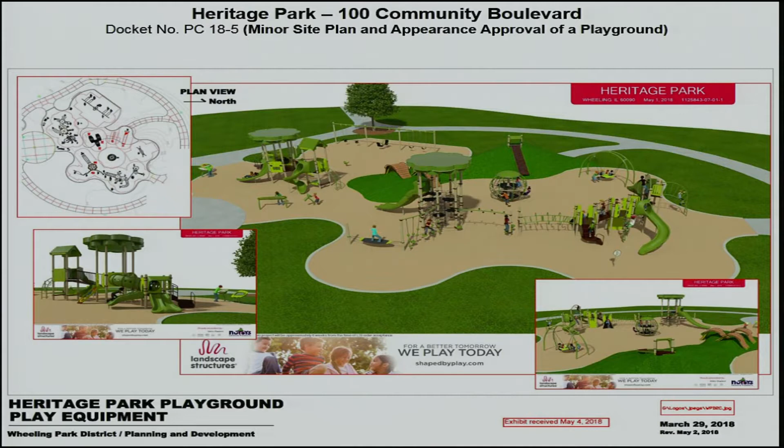Our intention on the landscape is generally to keep it simple. We want this playground to be open, to be visible. So the theme of the landscaping is primarily open and natural.

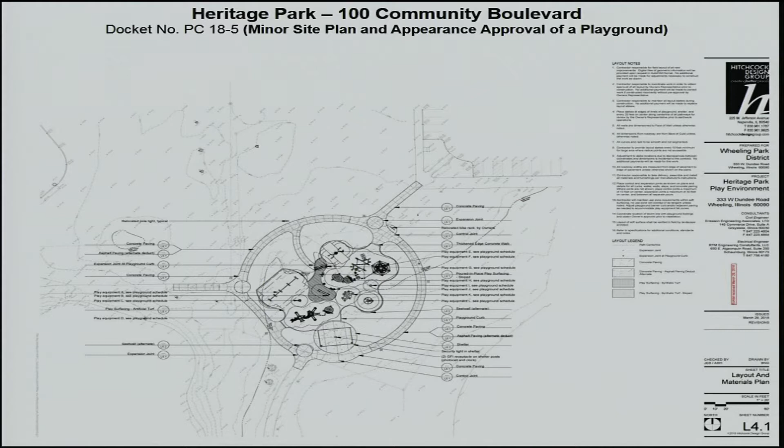And on the playground, on the landscaping itself... I think it's the landscape plan. There you go, it's kind of hard to see, but we have one here.

The idea there is we've got transitions: you have the path going around, lawn areas, and then the perennials and shrub areas, and then you're into the playground. So there's a lot of transition, and we're working with heights, textures, and colors throughout the landscaping. There's a lot of color in the landscape palette from spring all the way through fall.

We've got very few shade trees. I believe there's 9 shade trees, maple for fall colors. There's a Japanese Zelkova, which is in the elm family but resistant to Dutch elm, and that's why it's being used. And then thornless honey locust and swamp white oak, which are trees that we have in Heritage Park. So it's kind of bringing in the landscape that we have throughout the rest of the park, including some of that in here.

And then the ornamental trees are primarily for color. We have serviceberry, which has white flowers in the spring but also has fall color, and the Peking lilac, which has fragrant flowers in the summer.

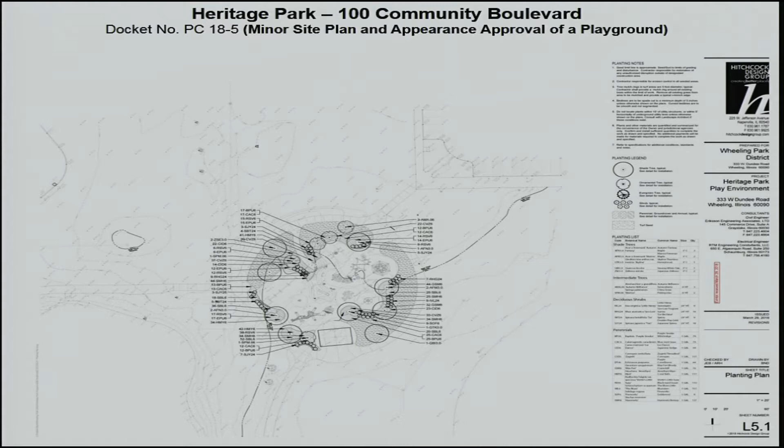Same with the shrubs, we've got a variety, 4 different types, all low. The idea is to keep views into this park, but they're all flowering, and most of them have fall color as well, like the sumac and the spirea. And then perennials, we've got a nice mix that are going to provide colors throughout the season, yellow, indigo, purple, pink, a lot of different colors, and then some lower grasses too to give it kind of a natural look.

So there's all the pictures of the plant material, and this is kind of what we've been providing you with recently, not just the landscape plan but these images so you can have a better understanding of what the plants look like. So having said all that, we are very, very excited about this playground, and we look forward to it, and we'll be happy to entertain comments and questions.

Great, thank you, thank you Mr. Raffel. Commissioner Johnson. Well, thank you, as always you guys do a very impressive job on getting these packets together for us. The pathways are all asphalt?

The pathways around the playground are concrete. They are concrete? Right, just where you're tying in is the asphalt? Right. Okay, I really have no other questions.

Thank you very much. Commissioner Creech. Thank you, Mr. Chairman. Thanks for the great presentation, everything looks wonderful, I'm excited to see it finished. Thank you. What are you going to play on?

Commissioner Blanova, thank you. I don't have any questions or concerns. Thank you very much, beautiful, can't wait to start using it. Thank you.

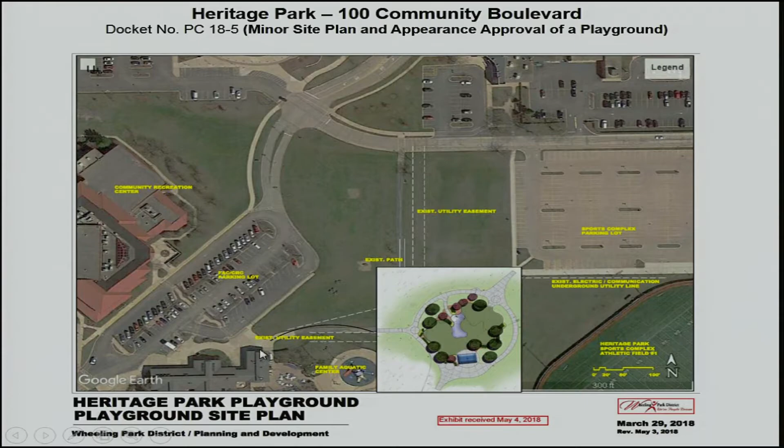Okay, I'm just wondering if you have to cross the parking lot to get to it. I'm sorry, the Family Aquatic Center has restrooms that you can access. Okay, so you can access that same from the outside, that's right? Yeah, so will you be allowed to go into the pool to get into the bathrooms? No, you can access the bathrooms from the outside, by the concession area. That's true, it's been a whole year since I've been there, so I forgot.

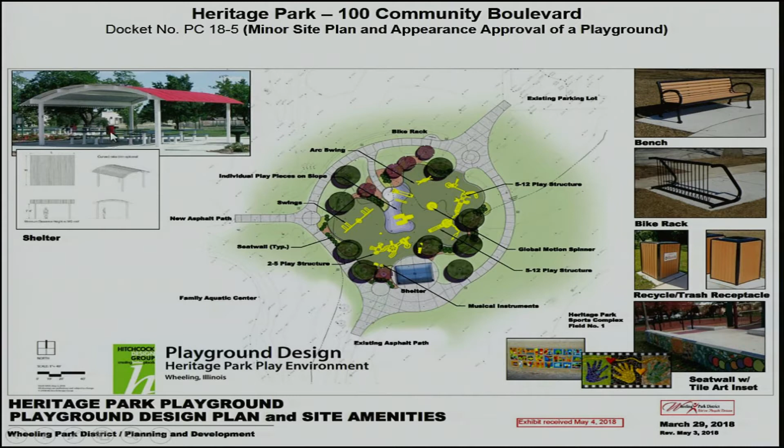Okay, and then in the picture of the example of the picnic area, there is a grill, you didn't say anything. Is there going to be a grill area in our version of the shelter? No, I think that was just the image that came from the catalog there.

Okay, it would have been nice, but I assume fire code and things. But yeah, that was it - restrooms and shelter, but looks amazing. And I would love a zip line in every park in the whole world, like at the library. This is - I've never seen the arch thing down the hill. I think that's very cool, and the roller slide. I'm looking forward to that, so yeah, very cool.

Thank you, Commissioner Powers. Thank you, Mr. Chairman. Wonderful planning as usual. Couple quick questions - you did mention lighting, is that going to be pole lighting, or are you going to have something like in the ground? I was just curious, you said the play area would be lighted. It'll be the pole lighting, the ones you see right there, they'll be relocated to the perimeter of the playground.

Okay, last thing too is, you have extensive landscaping. How do you typically make sure that that's maintained? I mean, as far as watering, do you have water trucks that go around and water the planting? We have water trucks, I believe. Sometimes we have the meter from the hydrants. There is a hydrant nearby, but we have water trucks, and we maintain our landscape pretty well done. I have nothing further.

Commissioner Dorgan: This is a wonderful design, and I really love the choice of all the trees and the planting, because I think it's going to be really nice all seasons. So thank you again for a complete packet, it's really appreciated. Thank you. I just have a few general questions.

The wall signage depicting the company's name will be displayed at the northwest corner of the building, similar to the sign on the existing building. The exterior lighting consists of parking lot and wall signs, wall light fixtures, and will follow the village's photometric standards.

Both the production bay and the office bay are rectangular in plan. The office bay will consist of offices, storage rooms, a break room, women's and men's toilet and locker rooms, a tool room, a maintenance room, mechanical room, and a quality control lab. Each elevation has been carefully designed to complement the look and feel of the existing facility, incorporating matching brick, windows, and metal siding. Work will consist of, but not be limited to, reinforced concrete foundations, steel structure, exterior wall facade consisting of masonry and metal siding, roofing, doors, windows, interior finishes, loading dock doors, and equipment and MEP FP work.

Masonry will be featured at the office bay on the south side of the production bays and a portion of the east and west sides of the facades of the production bays. We have the masonry and metal siding samples if you'd like to see them, and we will comply with the Engineering Division and Fire Prevention Bureau memorandums. With that said, I'd be glad to answer any questions you may have.

This is a public hearing. Is there anyone in the audience that wishes to speak on this matter? No. Okay, great. We're going to start with Commissioner Powers.

Thank you, Mr. Chairman. I'm going to go to a question in the packet. I was mentioning about a 13-foot band of masonry on some of the elevations. Could you indicate where that is? Because I think staff had a question about it too.

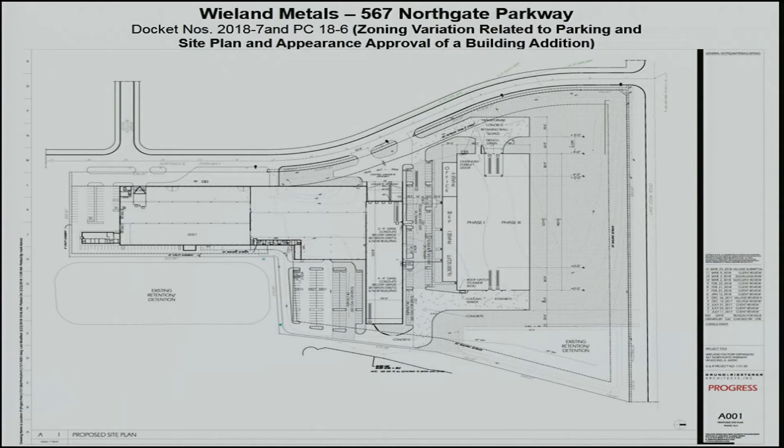Andrew, can you pull up page 41? I have a question - which plan is that, is there a number on it? There's always a number on the plans. A001, is that the one? Well, I don't know, I'm not really sure. That's A001 on the screen.

Looking at the West Drive and the rear of the building, those three parking aisles - I believe I saw other renderings where the west aisle is shaded and one row at the back on the east side is shaded. Do you know why? We're doing different paving - some concrete paving, some asphalt parking paving, and also driveway paving. It's just indicating the different materials we're using. Okay, so it's just to differentiate between the materials, because I didn't know.

The only other question I had was, in the new addition, the two big additions with the bays in the back facing east, do you have any plans to put any lighting on there to light that up, or no? I saw in some of your other... There's lighting above the doors, that's about it. There is? Okay, there will be? Yep. Okay, I really have nothing else at this time.

I'll ask the poll right now. I'm proposing that the brick get extended all the way to the north on the west elevation.

Commissioner Johnson, are you saying all the way across? Yes, so in between the doors and everything? Yes, as it is on the existing buildings. Yeah, I think it would look better. Commissioner Blanova? Yes, thank you, I think it will look better. Commissioner Johnson?

You don't get to vote twice. I'm not in Chicago. I agree with what Don said, so I'm a yes. Commissioner Dorban? Yes. Commissioner Kalis? Yes. And Commissioner Creech? Yes.

Great, thank you, we will extend it on the north. We may stop it maybe by the windows there, so when we head onto the building it's easier. So at the beginning of it or at the end? The end of the beginning, windows, just a couple feet from the end. Okay, that would be fine, just to make it easier when we head on.

And I've always pronounced it Wieland, but it is Wieland, Wieland Metals. Okay, great, so I learned something new.

What happens in those buildings? I'm curious, because I go by and I see... secret? Okay, that's what I thought. I go by there sometimes and the overhead doors are open and I see a whole heck of a lot of steel, so what goes on? Their major product, I don't know Frank, you can help me out here, their major product is copper.

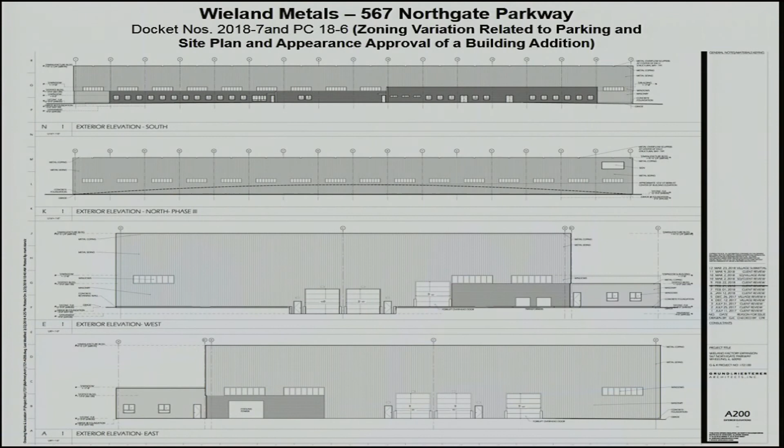Well, I think what you're seeing right now on their representation of the north elevation is the berm, the height of the berm superimposed on the building to illustrate how little of the building you would see from Lake Cook Road. The landscape plan, let's see, it's on one of one.

One of one, the Julie in the corner. Where am I looking here? Maybe the last sheet, Andrew. Nope, maybe not. So there's an existing berm, you can see it on the topo. There's an existing berm along Lake Cook. The petitioner intends to keep that berm throughout the construction.

If the desire of the Plan Commission is to reduce the landscaping in this area to avoid tearing it out, we can certainly work with the petitioner on moving it north so that it would be clear and have the greatest chance of surviving the future addition as well.

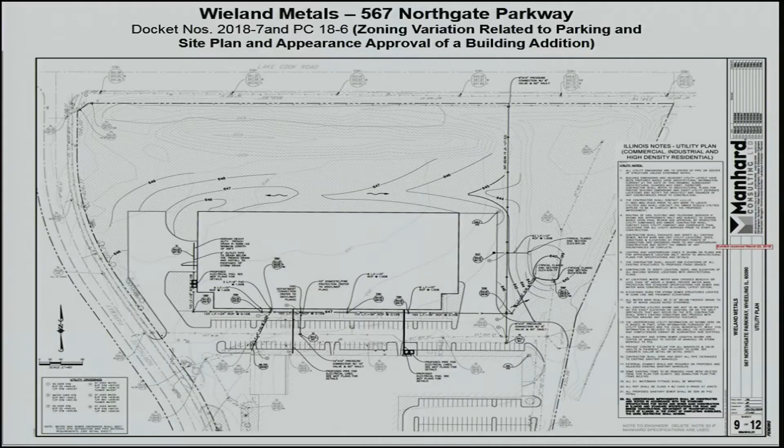So, I don't know how to poll that. Should we give the petitioner latitude on the landscaping on the north side of the addition? It's a good way to put it, and working with the village staff.

Commissioner Johnson? Yes. Commissioner Blanova? Yes, sorry, speak a little louder. Apologies, yes. Commissioner Powers? I would think so, yes. Commissioner Dorban? Yes. Commissioner Kalis? Yes. And Commissioner Creech? Yes. So we'll give you, work with staff.

We'll work great with Andrew and Brooke. Maybe add some things, but maybe not as extensive as here, but maybe stuff out towards the berm. Possibly, put something out on the berm. Exactly, just to save that. Plus, everybody drives 70 miles an hour on Lake Cook Road anyway. So, but I mean, it's extensive and it's nice, and I would hate to see that ripped out, so.

Can a comment go on the landscape plan that says those plantings will be irrigated, or is that just an understanding? I don't see it on the landscape plan. I thought there was a staff comment, one of the proposed conditions by staff. We're working on drafting the rest of it right now.

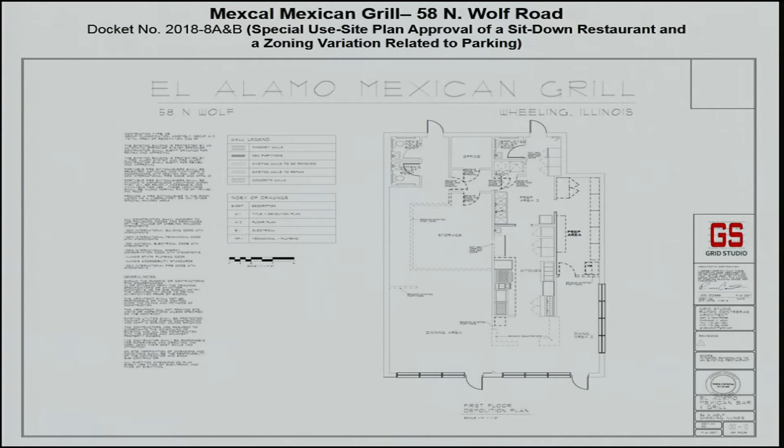So, as you can see, all the right side of the business is going to stay the same. We're not touching anything on the kitchen or the existing counter area or storage room. The left side of the business is the one that's going to get remodeled. Currently, where you're pointing at, there's a small storage room in there. That storage room and that wall are going to disappear in order to make it look bigger and have better space for our staff and customers to feel more comfortable. That's basically the only big change besides adding the bar to the restaurant.

Okay. All right, this is a public hearing. Is there anyone wishing to speak on this matter? Okay.

We'll start with Commissioner Kalis. Thank you very much, Chairman. I had a question, but I think it was answered by Andrew's explanation — it's been operating this way for a while, and the variation is not as big a deal because you've obviously found that the parking isn't a problem. So I guess the main question I had is, you are expecting a lot of foot traffic — you get a lot of foot traffic there now?

You get a lot of foot traffic there now? Well, currently the foot traffic is not as expected. We believe that we can increase the sales at the restaurant, yes. That's the whole point that we purchased the business.

We have talked with the other tenants on the plaza to let them know about these things. They are all okay because basically we have a doctor and an insurance company there that close really early, 5 to 6 p.m. So their parking spaces are not utilized after 5 p.m. Even though we only have 12 parking spaces, there's more space after 5 p.m. where we expect to be a little bit busier. During lunchtime, we're already meeting like full capacity, and lunchtime periods are between 15 to 30 minutes that guests are in and out, mostly for takeouts. So we believe that we can fulfill all parking spaces for that.

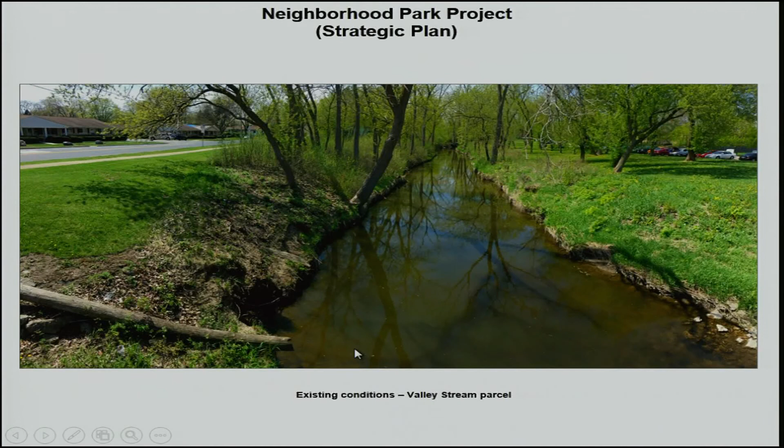We're looking possibly in this area so it's not directly at the end of the street, so it would have good access for the neighborhood and be away from Elmhurst Road, which can be somewhat noisy due to the surface and speed of travel. I want to open it up to comment from the commission and confirm our intention matches what was originally intended with this project.

Comments, anyone? Does Cook County own it now? No, it's privately owned by an owner who has essentially given it up for lack of paying taxes for, let's call it, 30 years. Rather than pay all the back taxes, a municipality can apply to take over ownership and assume responsibility of the property.

If I remember correctly, we talked about different pictures of different kinds of benches, and we also talked about some pretty much maintenance-free type of plantings, correct? Has that changed at all?

We went through several different concepts. We did have an example from Naperville that had a paver surface under it. It's been quite a long time since we talked about it, which is why we're here, not just ordering it and putting it in. But yes, we had some concept for planting. We can certainly do that.

The thing we're most concerned about right now is making sure the concept of the bench and this concrete pad is low maintenance but also easily accessible. That's the main piece we're confirming. If there's a desire to still pursue landscaping around it, we can certainly go back and look for opportunities to landscape it.

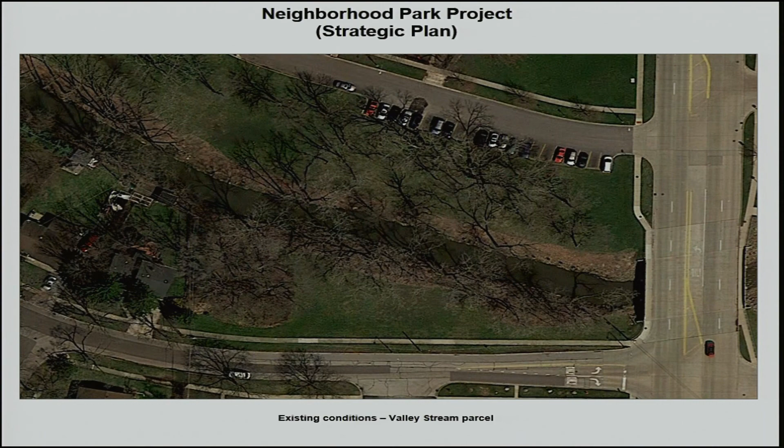There are multiple areas in the village we've been looking at, so this is the first one, I think. I like the idea, I'm just wondering, it's so simplistic, like okay, well put a bench there. That's why we wanted it simple, and it's something we talked about years ago to bring this to the village.

What did you guys talk about? Obviously I wasn't here. Is there any requirement for fencing off the creek? Is that a safety thing if people are going to be congregating there? At this distance, no. If we had a concept approaching the edge, we'd probably be looking at some safety concern, but at this point this particular spot is flat, near the sidewalk, and quite a distance from the creek.

I guess my question is, would it be encouraged for people to go, like my daughter loves seeing the fish on the bridge over to Childerley Park, and if you could get near the water when there's water there, and see ducks or whatever, a duck feeding station or something. So I'm just trying to envision what people would do standing there. No feeding the ducks, is that a rule? Yes. Well, they don't do it now, so what makes us think they're going to do it in the future?

Wait, I have a disagreement here. It's probably not meant to be that, but it's there, it's open now, as Commissioner Dorban had said. True, but it's a good point. It's a good perspective to take into consideration as we build onto that.